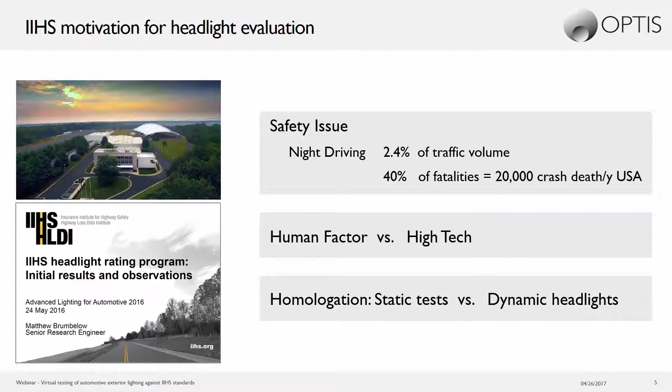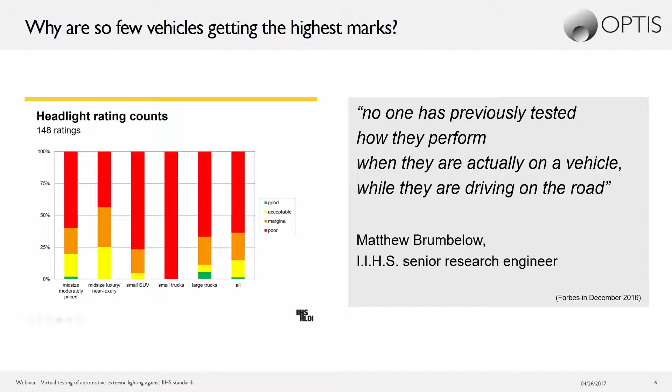From a customer point of view, the IIHS standards are worth existing as they reveal that despite the use of advanced technologies, a large number of automotive companies are failing the IIHS headlamp tests on their 2016 models. With such intelligent and efficient systems, why are so few vehicles getting the highest marks? Matthew Brumbelow, Senior Research Engineer from IIHS, has a simple explanation. No one has previously tested how they perform when they are actually on a vehicle while driving on the road. That's one of the key differentiators of the IIHS test. It is performed dynamically. I will let Valentin Albo detail what is different about IIHS standards.

Hello everyone, I'm Valentin Albo, Solution Engineer working for the Optis North America office. Today I will present what led IIHS to create its own headlight test and what the differentiators are compared to other similar existing tests.

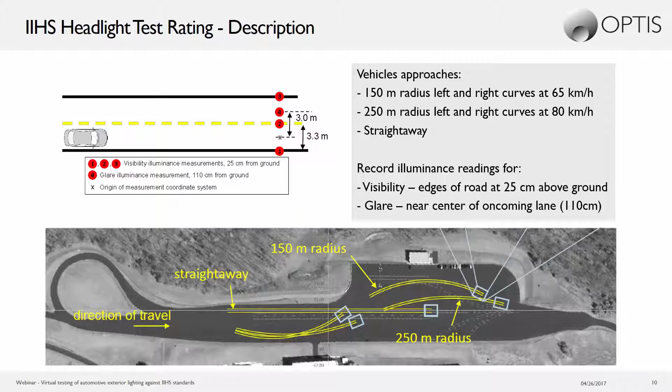Yeah, hello everyone. I'm Julien Muller, I'm in charge of all the products from Optis related to automotive lighting, from Speos to VRXperience headlamp for night test evaluation. So today we focus more on the VRXperience platform. This platform is dedicated to test and validate all the ADAS systems of your car. So it starts from the headlamps, for sure for the ADB, matrix beam, AFS function, DBL, or even pixel beam, which is a new feature we just introduced.

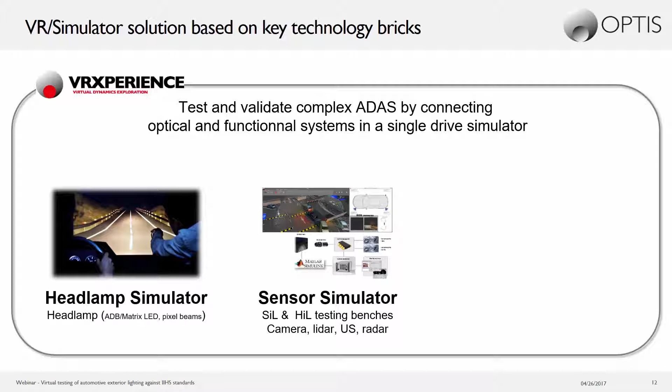But with that platform, we can also evaluate some sensors, such as camera, LiDAR, ultrasonic, and radar as well. But last but not least, as it is a driving simulator, you can also experience cockpit ergonomics and behavior in a 3D immersive simulator while driving your car. So today, as we are discussing IIHS, I will focus more on the headlamp simulator.

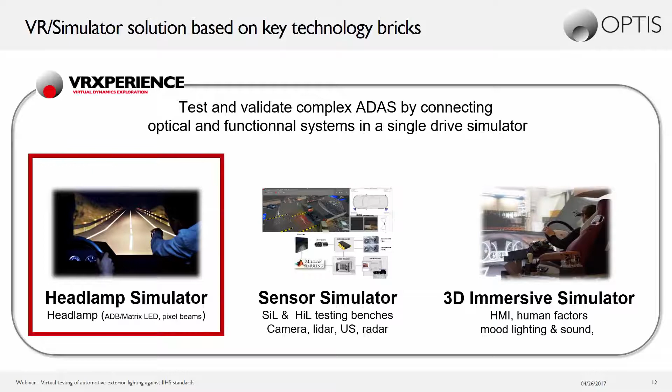So our solution for that night test is a unique validated physics-based rendering. We based our software on the Speos engine. We are using measured BRDF, and we are certified by an independent laboratory as a reliable solution. We have a real-time dynamic lighting strategy, as I mentioned before, for AFS or ADB applications. We can also reproduce traffic maneuvers like crossing a car or following another car, for example. And of course, the software is really super easy to use.

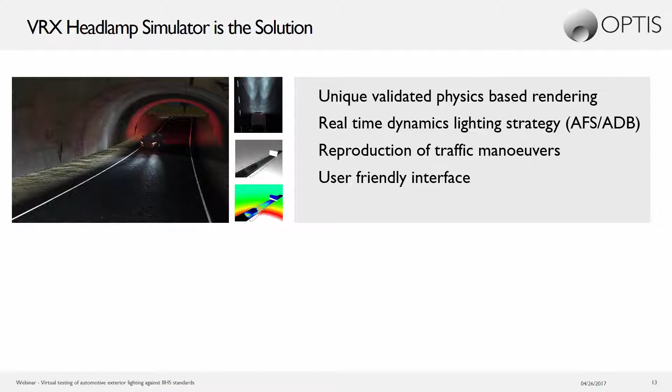And we have also something nice, not for today's application for our topics for IIHS, but we have a glare analysis which is dedicated to measure the discomfort glare. So we'll see later that the glare evaluated by IIHS is just based on illuminance value, which is much more simple, I would say.

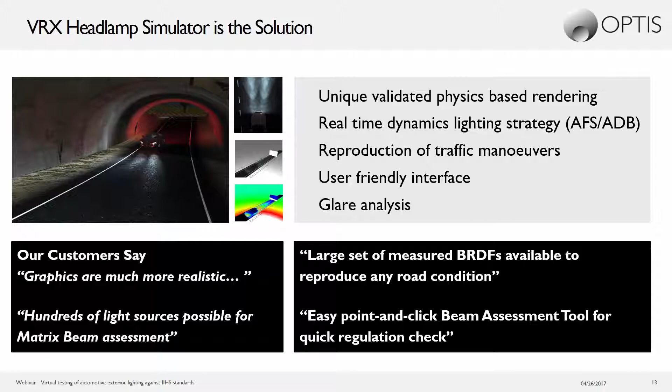So you can see here some comments from our customers. They say that our graphics are much more realistic than our competition, you can imagine. And our strength is really our capability to manage a high number of light sources, especially for matrix beam, or as I mentioned before, pixel beam. We have a large set of BRDF, which is also appreciated by some of our customers. And also the last point, it is easy for your engineers, for users to use a new software. When it is easy to use, it's easier to adopt and to quickly check a new regulation. So that's a brief overview of our solution.

Let's now have a short look, more of an overview, through a video. So this is our corporate video to present our product. So the experience, as I mentioned before, is a night drive simulator for testing automotive intelligent lighting. So you can see here it can be connected to a buck, for example here with 3 screens, but we can have different configurations depending on your needs. So you can have collaborative review to make some evaluation of something you detected last night, for example, during a test.

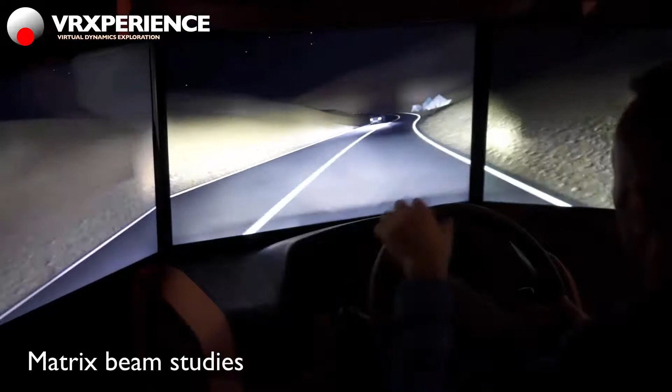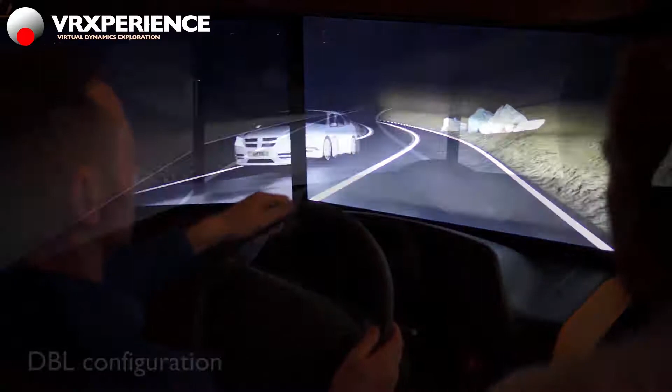So this one is a video from the Opel Corsa ADB system. And maybe this is something you want to reproduce in virtual reality. So here we have the solution. In that case, it is based on 25 pixels per side, and we are detecting the car. And to avoid glaring the oncoming car, we are switching on and off some pixels. As you can see here, it's quite obvious.

For sure, we have also the DBL management, where we can control the angles of the low beam, for example. And as you may know, this DBL has a huge impact on IIHS. I will discuss that later.

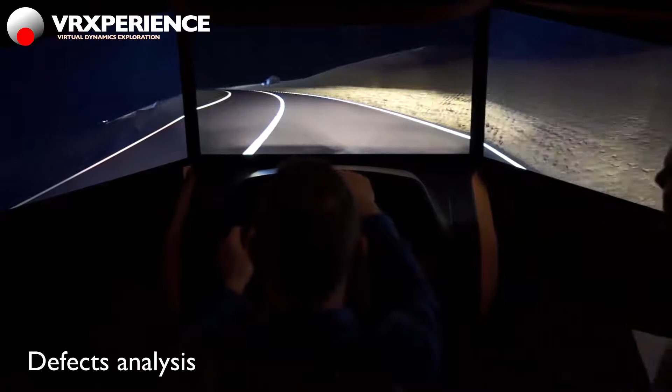And here this is another application of intelligent lighting, which is more for town and low speed conditions, which is economic. So as this software is spectral based, we have the color evaluation as you have seen before, between halogen and xenon, for example. And for sure, it is dedicated to detect some defects, like homogeneity issues, dark spots, hot spots, some issues on the high beam, for example.

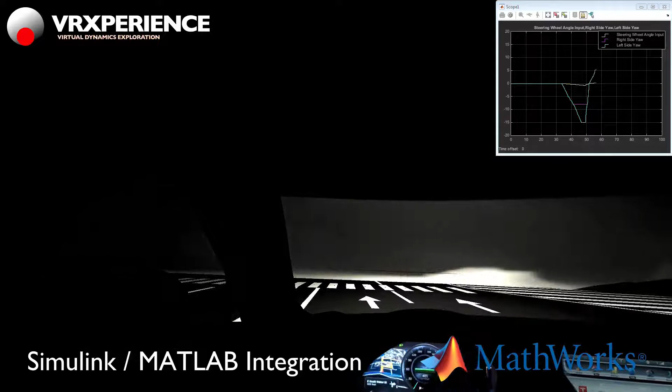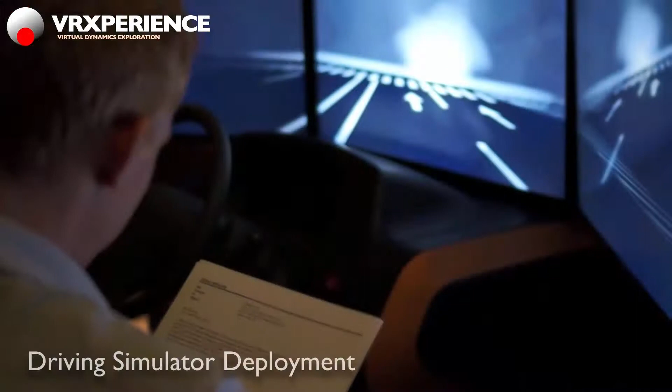One of the topics we'll discuss today is also the aiming of the beam pattern. Here you can see our interface to adjust the aiming through an aiming wall. And you will see here the connection to Simulink. That track is a dedicated track we have done close to Paris, which is a realistic environment, really to have a good feeling of our cars. Here the driver is quite aggressive, but you can see that the rendering is quite impressive.

So we can deploy our software in different conditions, such as these 3 screens. That one is another configuration in a 4K flat wall with a real car put in front of the screen. And we are preparing new scenarios, advanced scenarios, like pedestrians. You can see city with traffic lights, highway conditions, sun glare, a lot of new cases which are not only happening during the night but also during the day. So that's why our software is a huge platform for driving experience. So that's a brief overview of our product, and I will come back now to the IIHS topic.

So our solution for IIHS is to connect our platform to different solutions, different systems, I would say. The first one is to be able to consider the dynamic driving. So here we have the possibility to connect to some vehicle dynamics simulation software, such as CarSim, SCANeR, or anything else. We can receive some information, to have the pitch of the car, to have the roll of the car. So this is something important for that evaluation.

The second one is, of course, to manage the AFS lighting, especially here for the IIHS, where you can gain some points, or at least avoid losing some demerit points, with DBL. So when you are turning your steering wheel, your low beam will turn left or right, and so you will increase the range of your beam pattern. And we have these functions through C++ plugin or MATLAB Simulink, which is quite common for automotive system engineers. Of course, we have the headlamp management, where we have the possibility to simulate any intensity.

How does it work? So you can see my screen. This is, sorry for that. This is the interface of VRX with some true color plus isolines, as you can see here. We have the possibility to switch between low beam and high beam. So this is the high beam, low beam. You can see that the range is decreased in low beam. That's normal.

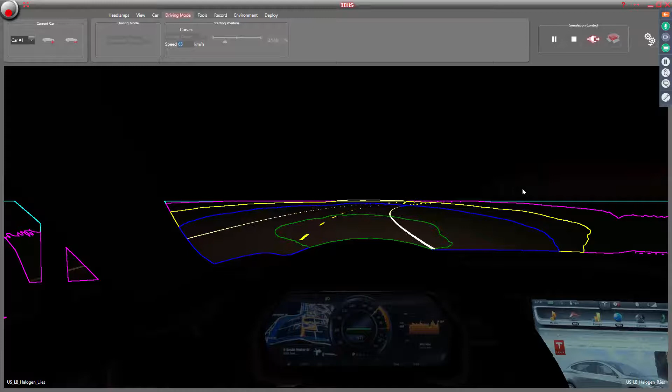So to perform the IIHS test, actually we are using a MATLAB interface to be able to control the sensors. So I will switch to MATLAB and I will just run a script, and I will come back to VRX. So here, as you can see, I'm now driving on a road. So here this is a straightaway road with some sensors. You can see the isolines on the sensor adapting. So I will discuss these targets later.

I will change back the mode to avoid the lines. So basically now the car is driving like the real test by following the curves of the IIHS track. And at each section here you can see there are 4 sensors which are placed on these targets. So in the background MATLAB is acquiring all the illuminance values which will be post-treated later.

So for now we are still driving, so now you can see that the speed has changed to 80 km per hour for the last 2 sections, and we start again as it is described in IIHS in high beam, so we reproduce exactly the same test but in high beam condition. So just wait a couple of seconds to finish the test. So we are still at 65 km per hour in high beam.

So as I mentioned before, you can see here the targets. You will see some very dark lines. So this is where the sensor is exactly placed, and this could be useful later to optimize our design. You can see on the third sensor, starting from the right, that the bold line is a little bit above the other one. So you can see here it is on the top.

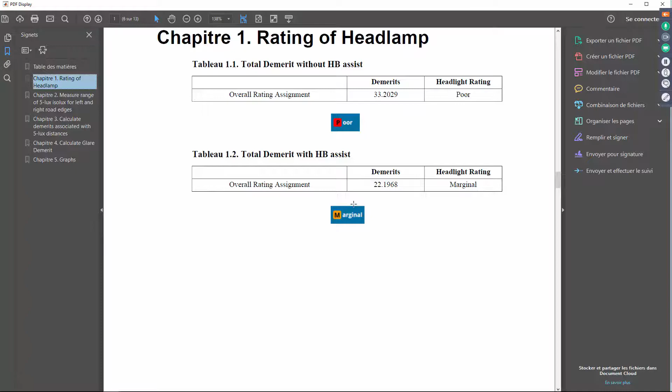So this is the IIHS report done by VRX. So I have a table of contents and I can directly switch to the result. Unfortunately here my headlamps have a poor rating. I can see that eventually with High Beam Assist, meaning that if I have the function to automatically activate the high beam, I will get some points. Actually the demerits value will be lower. So I have the possibility with that option to be only marginal, which is better than poor, but which is not so good or not acceptable.

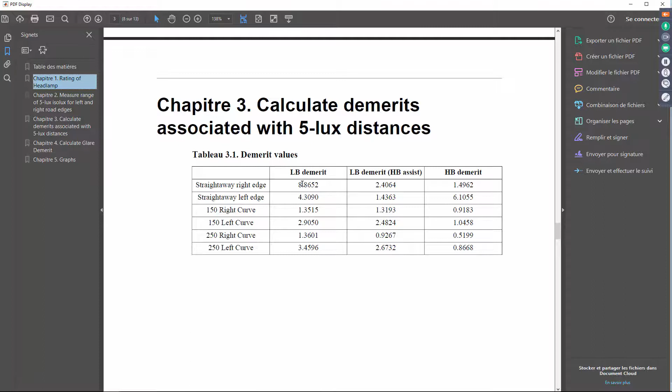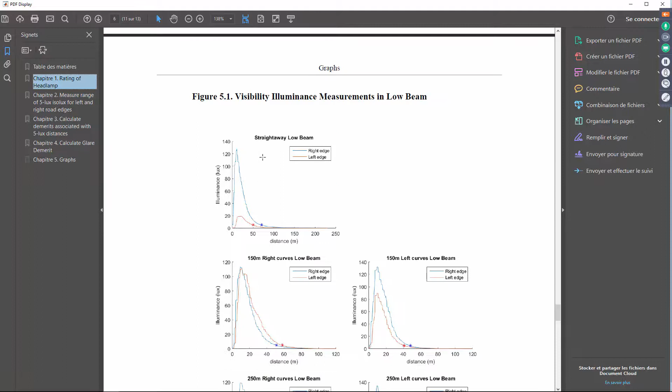So here I get my rating, and the key points of that report and the detailed analysis. We have now some values. So we have the values for all the criteria for IIHS. So all the 5 lux ranges are mentioned in that report, in that table. I have also the values, the different demerits, depending if I have the normal mode or with the high beam assist. I can see in that case, even if I'm not so good, I don't have any glare demerit, which is at least a good point.

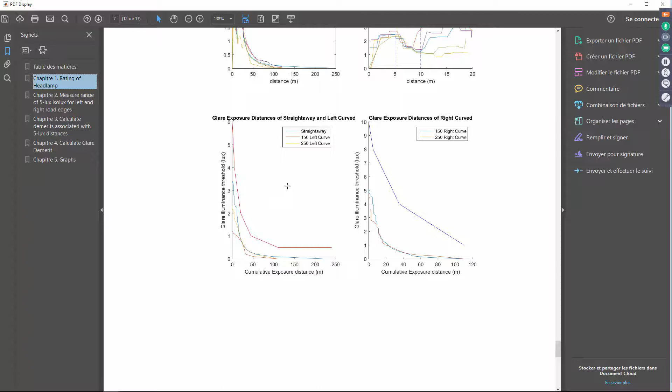And something really useful to understand and to read some graphics and to really understand how I can improve my design. So this is the full report which is generated by our macro. You can see just in a couple of seconds. Okay, so this is the report we just discussed now. Yeah, so it's okay, you can pass it.

I'll present the results. So from that report, now you have some results, so you can do some analysis and corrective actions. So regarding the targets I've mentioned before, you can see the bold lines is where the sensor is placed. So depending where your car is, you can maybe adjust some part of your design of your low beam or high beam to slightly change, for example, the shape of the cutoff to slightly increase the range of your low beam and to gain some points. So this can be visually seen through the target.

You can also see clearly here the impact by changing the aiming of your headlamps. By changing by a factor of 0.1 degree, for example, you can clearly see that on that target you will not achieve the 5 lux, for example, at a specific distance, so you will lose some points for IIHS. So this is something that you can do in real time.

Okay, so just a key highlight for what we presented to you today. This is one unique platform. VRXperience is a unique platform to assess your headlamp, to test it, and to validate any change in your design. Of course, as you have seen, we can record and replay some simulations. So it's a repeatable simulation. So you can really change one parameter to see the impact of that change. So you can compare, you can analyze any change.